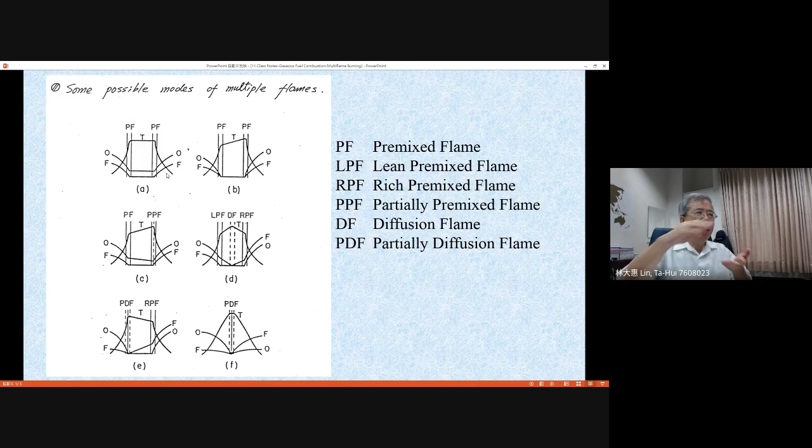This is a typical plot for a double flame generated in the opposed jet flow. You can have this kind of flame structure. Later on, I will use experimental observations to give you more insight to understand the flame structures. And here, since both premixed flames are lean, they should have some oxygen left on the downstream side without any fuel left. The downstream side for these two premixed flames is the center region, and you can expect the stagnation plane will just sit in the middle. This is case A: you have two lean premixed flames in your opposed jet flow.

Now think about, can we change the concentration differently? Look at case B. We need to identify the mixing ratio for both flames. You can see for both of them, oxygen and fuel will mix together on the upstream side, right? Most of the flames are premixed flames, and the oxygen and the fuel will be burned completely at the flame position. That means these two flames are basically stoichiometric, and they will reach the highest temperature points at the flame locations.

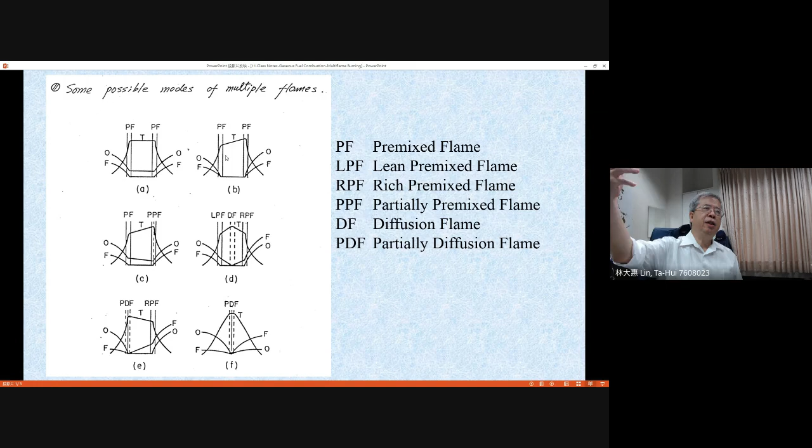But for the right-hand side, case B, the premixed flame experiences heat loss from the flame position to the downstream side, and the lost heat will be used to support the burning of the premixed flame in the left-hand side. Then you can think about the premixed flame in the left-hand side; we can say this flame is superheating. Superheating means additional heat is coming from the downstream to support their burning.

But the premixed flame in the right-hand side just plays a very normal role, because they just tell you there is some heat release and heat loss to the premixed flame in the left-hand side. Okay, for case B, they simply tell you there is some heat transfer between these two flames, and that heat transfer can be identified by the temperature gradient, which means it is governed by thermal diffusion. Okay, this is a simple thermal impact for these two non-identical premixed flames.

Even though both of them are stoichiometric, the flame temperatures are not the same. Okay, and they were influenced by the inert in the left-hand side or in the right-hand side. You need to think about that. Okay, this is the first one you need to think about. Now we go to case C.

Now the interesting thing is, first we need to identify what kinds of flames we have. For the left-hand side, oxygen is higher than the nitrogen, higher than the fuel. Then you have a lean premixed flame in the left-hand side, and also a lean premixed flame in the right-hand side. Both of them are lean premixed flames. But when you look at the concentration profile, because they are lean, all the fuel will be burned completely. Therefore, you do not have fuel left downstream, in the region between these two flames.

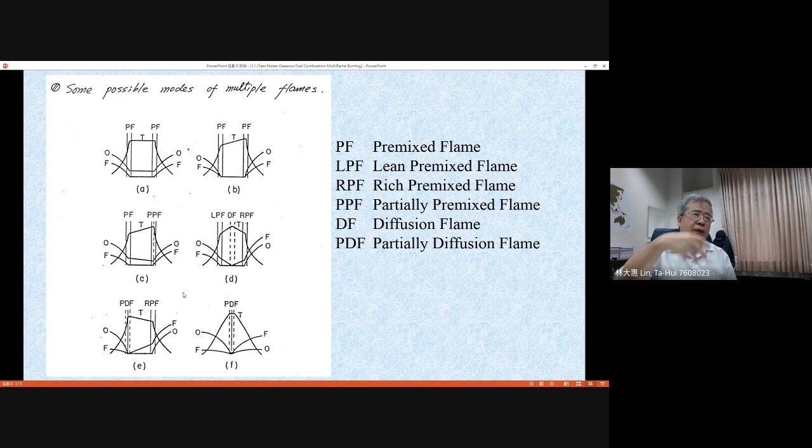Now you look at case E. I need to mention here this part is actually already included in your lecture notes, I think on page 1.47. Because I use the PowerPoint, it's easier to explain it rather than using the slides. But later on, we will go back to see the slides because there are some plots we need to use to give you some explanation.

Now we go forward to look at the flame structures for case E. They still have two flames, right? Now we try to look at the conditions for the flame. You need to identify them first. You look at the flame on the right-hand side. Fuel concentration is higher than oxygen concentration. Then you identify this as a rich premixed flame. We use RPF, rich premixed flame.

And on the other side, you supply oxygen with fuel, but the fuel is a very small amount, okay? Which means that this mixture is very lean, and maybe this flame should not exist, right? Because when the mixing ratio is lower than the lean limit, then you may not have a premixed flame, okay? But here you can see they still can support an additional flame here. Now we try to justify what kind of flame it is.

On the right-hand side, you will have fuel left, right? You have a large amount of fuel. If this fuel is large enough, it can be mixed with oxygen coming from the left-hand side, and actually they can burn here. But now try to think about what kind of flame you have. You have fuel coming from both sides, and oxygen coming from only one side. Now the question is, is it a premixed flame or a diffusion flame? It depends on which boundary condition has the important influence on your burning.

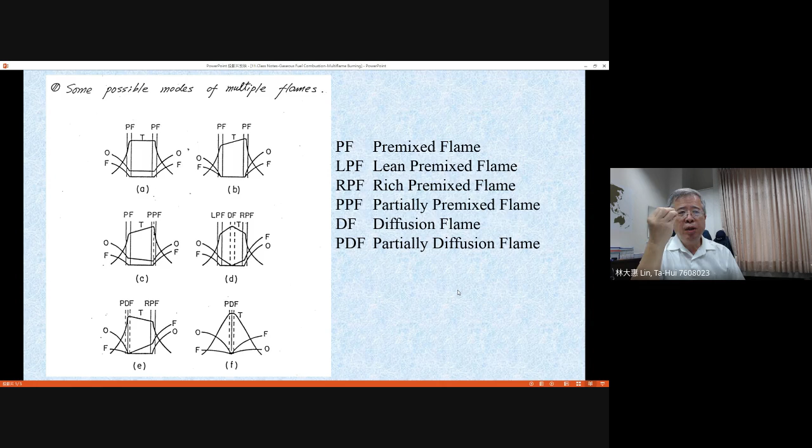Think about the name in a similar way. For example, I told you the so-called partially premixed flame means the major burning is controlled by premixed burning, but modified by diffusion. Then they say it's partially. But for the partially diffusion flame, this flame is mainly controlled by diffusion flame structures, and modified by a certain amount of premixing, maybe on the oxidizer side or maybe on the fuel side. You can reverse it, and you can make a good definition of the nature of this flame.

Now look at the final case. You have both fuel and oxygen supplied from both sides. But you need to identify a little bit here: on the right-hand side, oxygen is just a small amount, and fuel concentration on the left-hand side is also a small amount. Therefore, the major reactants supporting the burning in the middle are basically fuel on the right-hand side and oxygen on the left-hand side. They are separate. Then this flame should be controlled by diffusion burning. You will have a diffusion flame, but with some influence from the premixing of fuel on the left-hand side and oxygen on the right-hand side. Then we modify the name: this is the so-called partially diffusion flame.

Now you can see by changing those kinds of boundary conditions, the flame structure may give you so many opportunities, and they tell you by these kinds of situations, you may have different temperature distributions, and the oxygen or fuel may deplete in the downstream side.

You think about a turbulent combustion model, you see there are so many eddies, right? And one of the eddies maybe just has fuel itself, and the other one maybe has oxygen itself. And these two eddies meet together, supposedly you will find out they have a diffusion flame because fuel and oxygen eddies are separate, right?

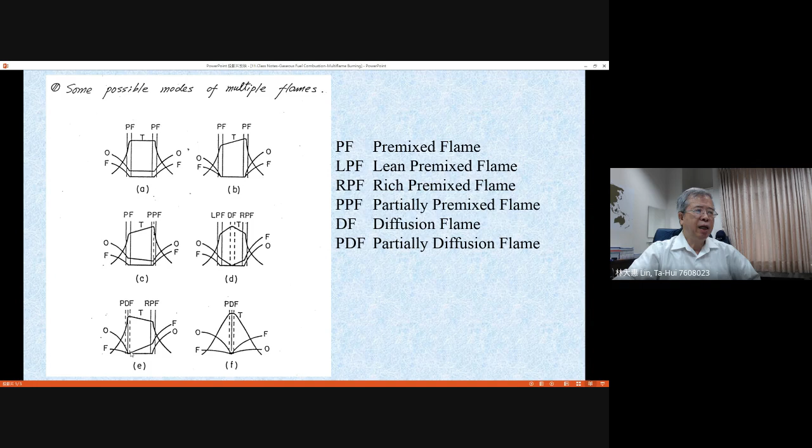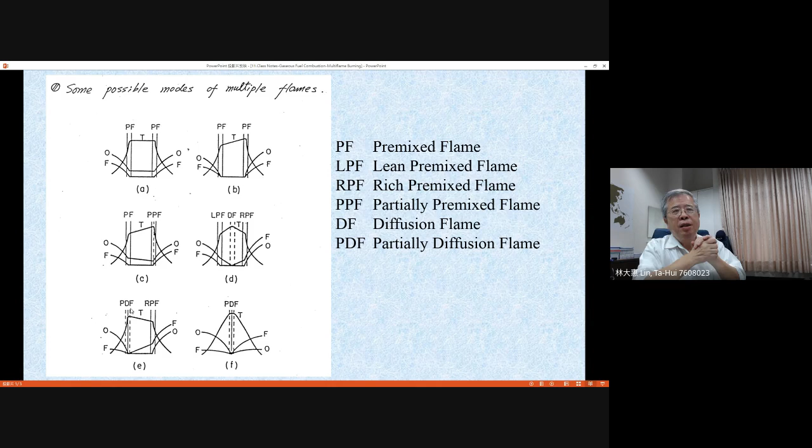Now, if you think about the oxygen still continuing to diffuse, for example, here diffusing from the flame to the other front, then there is another diffusion process. Okay, for example, in case E, the fuel coming from the right hand side will support the diffusion flame and burn with the oxygen together to generate the diffusion flame. Okay, those kinds of excess fuel or excess oxygen can sometimes modify your flame structures from the downstream, from different sides of your flame.

Now let's look at the experiment results. I did this experiment 30 years ago when I was at Northwestern University. I tried to bring those kinds of ideas as I described in previous slides to justify them by experiments. Okay, and we did this experiment by using opposed jet flows, and we tried to control the fuel mixing coming from the lower burner, and the oxygen coming from the upper burner.

And we hope we can fix the stagnation plane almost the same without too much change. Then we mix a certain amount of nitrogen into the upper flow and the lower flow, and they can balance it without too much variation in the position of the stagnation plane.

Okay, now by doing the so-called conserved systems, because overall the total volume flow rate for both the lower burner and the upper burner will keep the same, and the total volume flow rate for the nitrogen, methane, and oxygen also keeps the same, which means we just shift the fuel from the lower burner to the upper burner, and oxygen shifts from the upper burner to the lower burner. That's it. We just change the boundary condition without changing the total amount of fuel and oxygen available for burning.

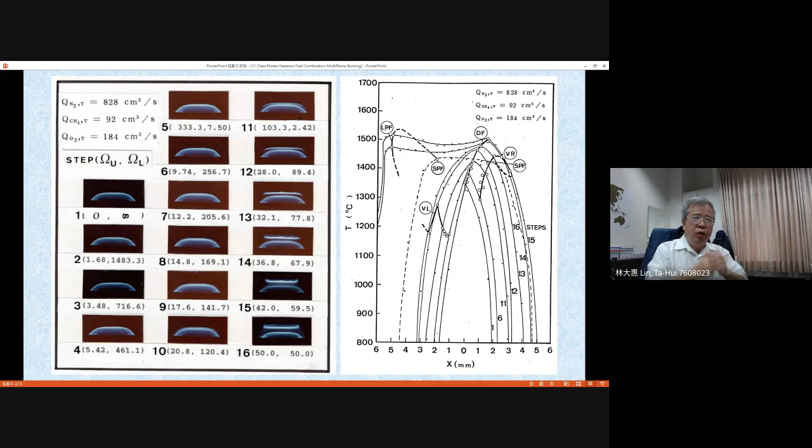Okay, and you can see that in terms of the highest temperature, this cannot be identified from the purely premixed flame or purely diffusion flame. For the multi-flame structure, you may have the largest high temperature region and the largest flame temperature, the highest temperature in this high temperature region, which means by using multi-flame structures, you may have optimal heat release from the combustion process.